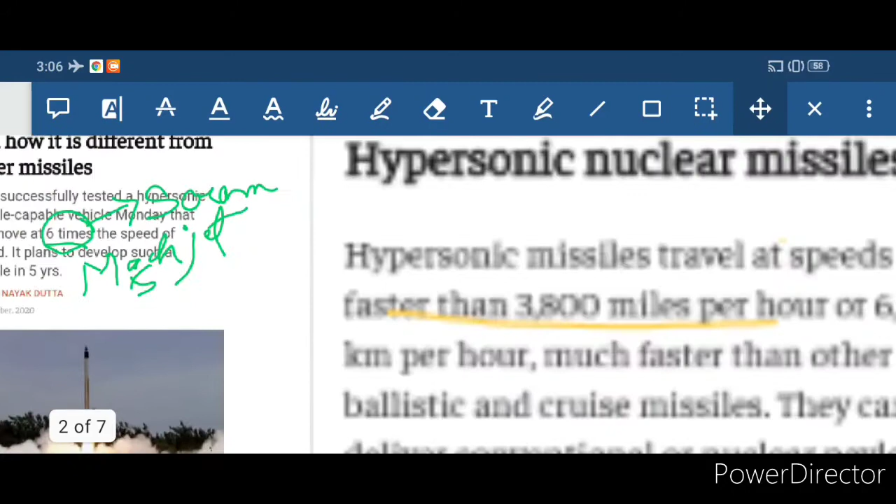Hypersonic nuclear missiles - nowadays countries are in a race to develop hypersonic nuclear missiles. That is why it's very important from our point of view to understand why people, why countries, are aiming for this technology.

Hypersonic missiles travel at a speed faster than 3800 miles per hour. Remember this - in 1 hour it can travel up to 3800, and this is in miles, not kilometers. I will convert this into kilometers for you, so don't worry, just watch the video till the end.

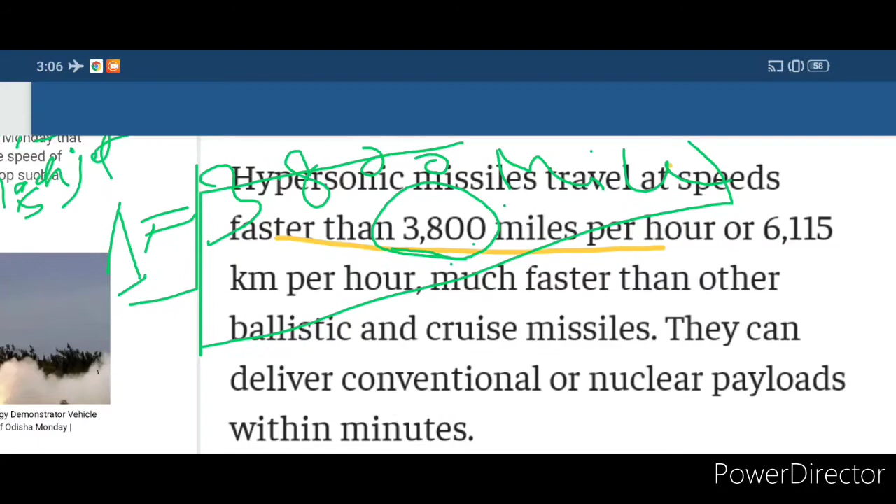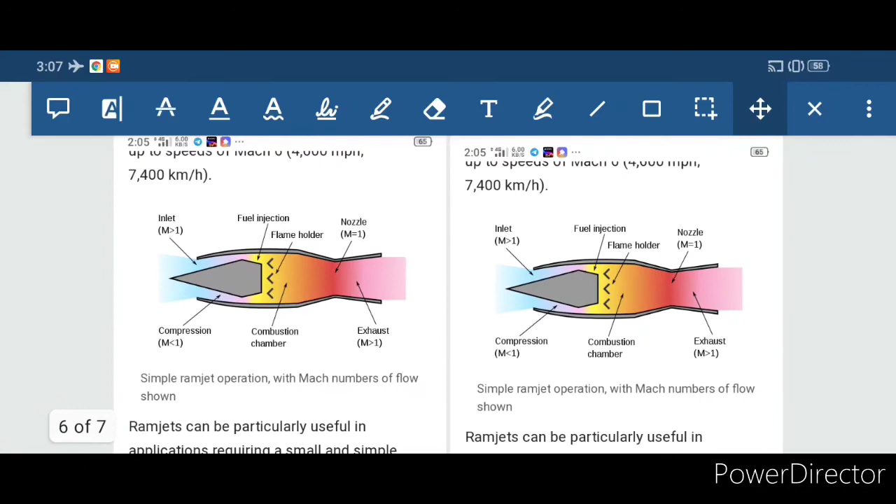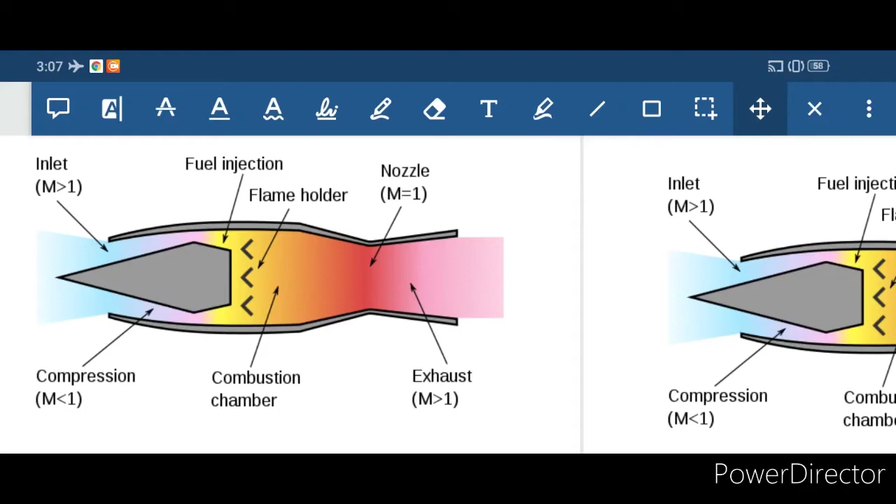Without further ado, let's jump into this. Let us see what a ramjet engine is. We were talking about the scramjet, right? So first we need to know the ramjet. Scramjet is the updated version of ramjet.

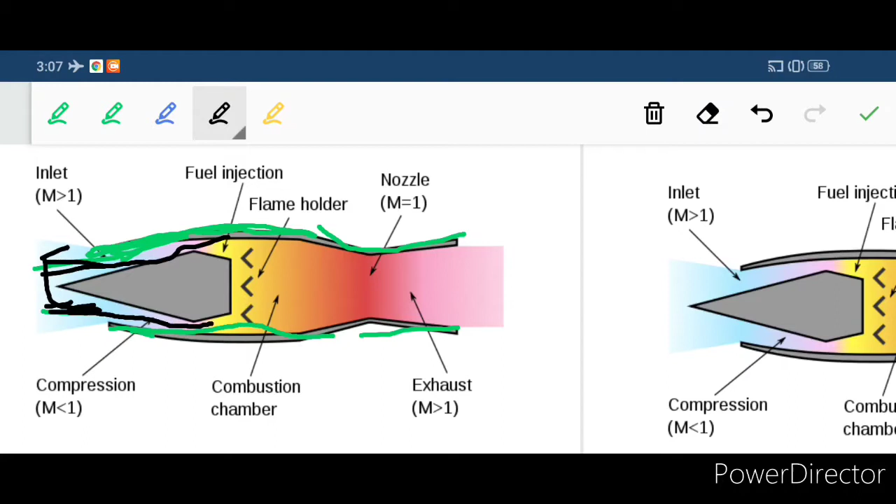Visualize this engine - this is the front part of a rocket or missile. In the front of the rocket you will find a space. From this space, look at these blue dots - this denotes air. This travels into the air chambers of the missile, and after combustion, the speed of air gets transferred into energy. This ramjet engine converts the speed or thrust of that air into the speed of the rocket.

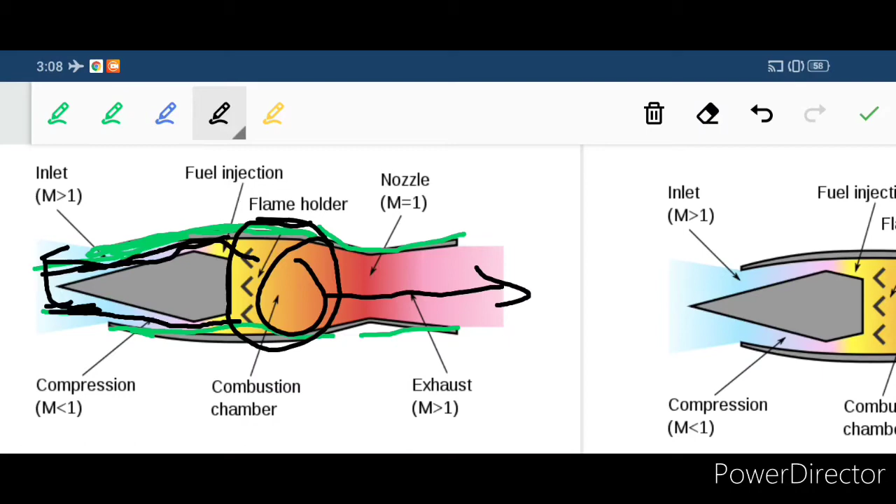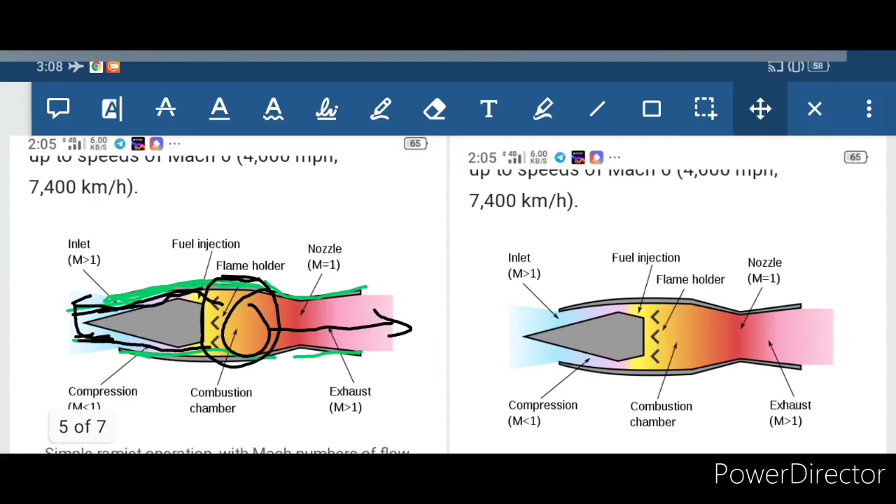By using this technology, nowadays we can even achieve the speed of Mach 6. That's all for the ramjet engine. Now since we've talked about the ramjet engine, we will discuss the scramjet engine.

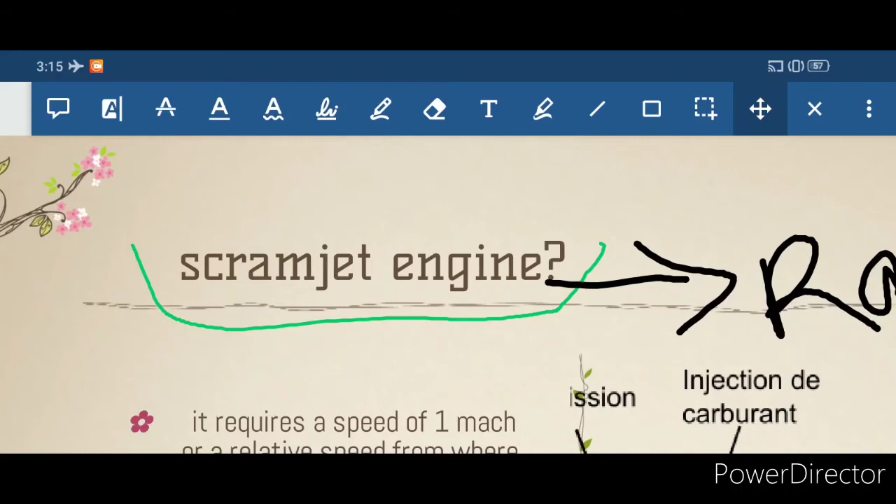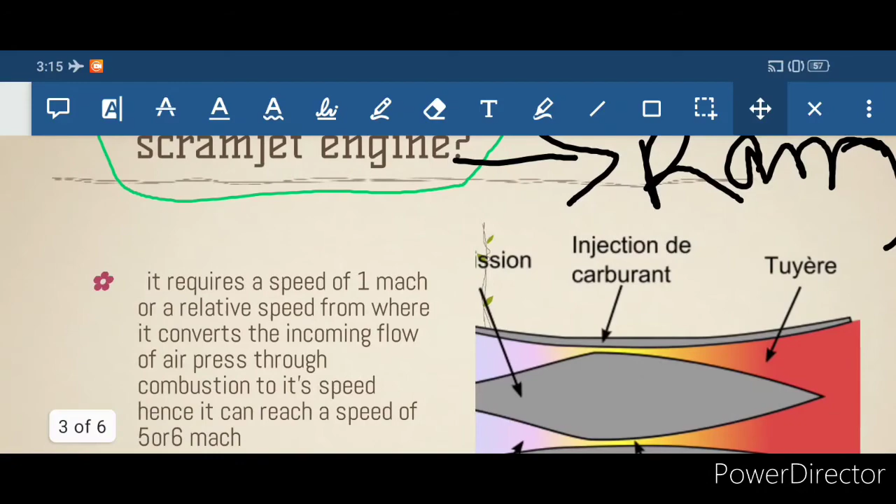In this part we will talk about the scramjet engine. The scramjet engine is the updated version of the ramjet engine, remember this. So what does the ramjet engine do? The ramjet engine requires a speed of 1 Mach, or a relative speed - it cannot be started by itself.

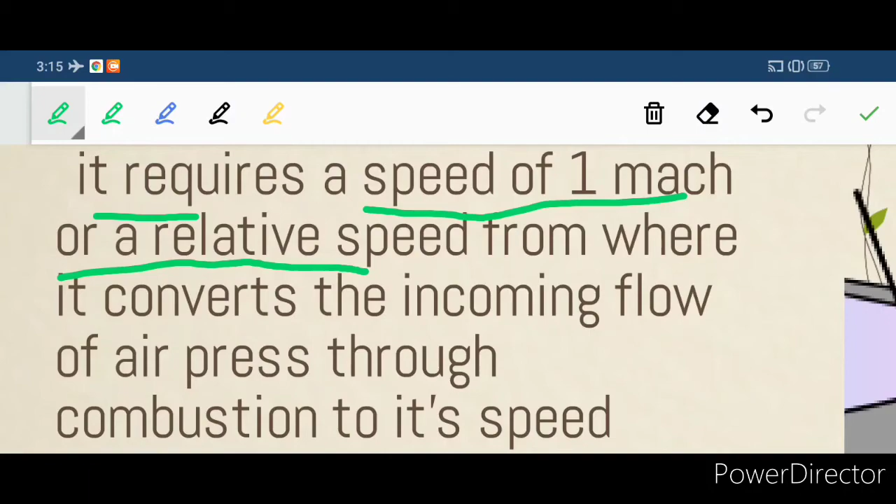Only after reaching a certain speed does this engine get into its course, or get started. It requires a speed of 1 Mach or relative speed, from where it converts the incoming flow of air pressure through combustion into speed. Look at this picture - this is the front of a ramjet engine, and this is the back part.

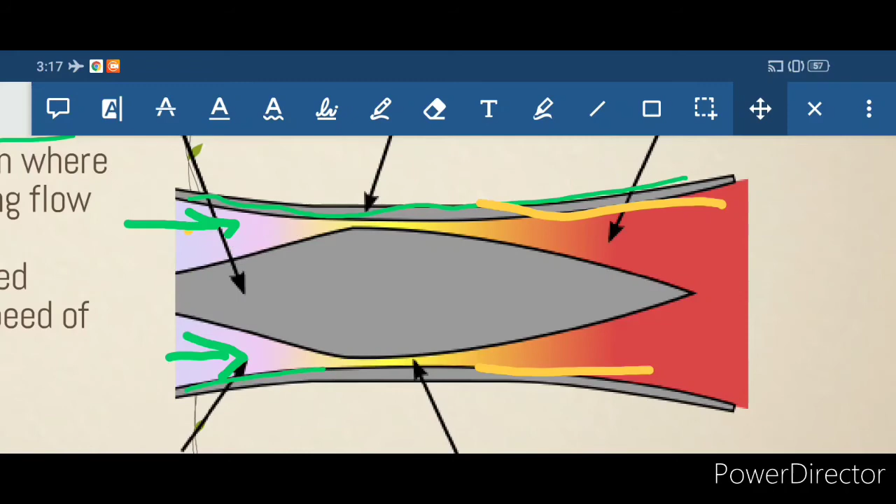Nowadays in different vehicles you will see a sort of hole - that hole is for inflow of air. When a rocket gets into relative speed, air starts to travel through that hole, and when it gets a speed of 1 Mach, this air pressure gets fired, gets lit up. After combustion, it transforms into energy, giving a bigger thrust to the vehicle and producing hypersonic speed. That was the basic idea about the scramjet and ramjet engine.

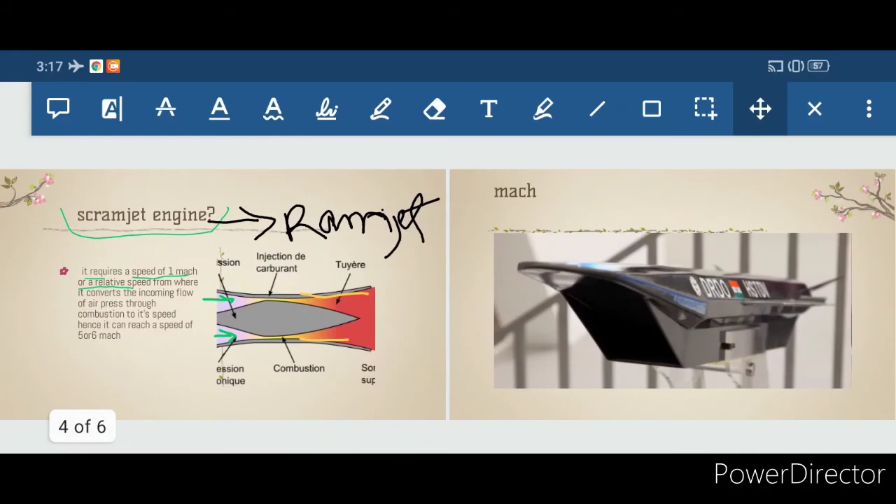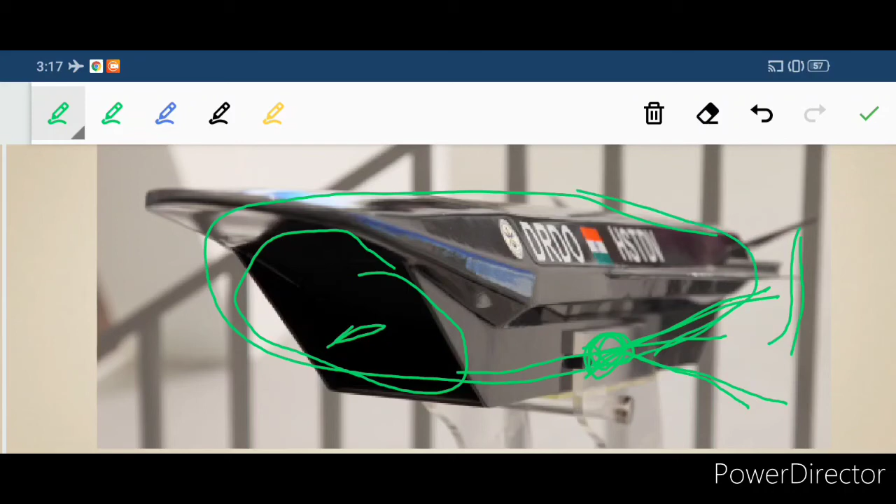Now we will discuss Mach. Look at this - this was the recent vehicle launched, developed by DRDO. You can see this was the hole, from here air travels, and in between it gets combustion, and when ejected from the vehicle it produces the thrust. This is how the vehicle gets higher speed, the speed of Mach.

So what is Mach? Look at it - 1 Mach is equal to 1234 kilometers per hour. So 5 Mach is equal to 1234 times 5 - the recently launched DRDO vehicle reached the speed of 5 Mach. Just divide this and you'll get the answer. That's all about Mach.